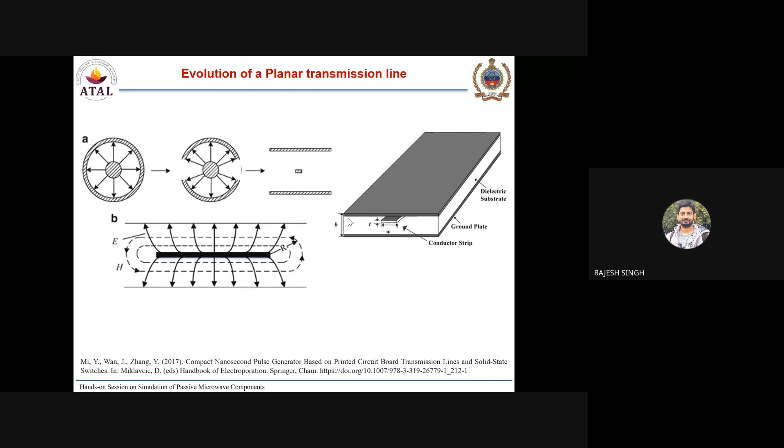And if we take the E and H cross product, then you will have the feeding which will go inside this center conductor. So this is the basic concept of coaxial cable or maybe other cables. So now we have moved from the 3D coaxial cable to the strip line. So why are we saying it is planar? Because the third dimension, which we see in the height, is actually very, very small. So we treat this dimension as much less than lambda. So we call this line a planar line or 2D line.

But the problem with the strip line is a handling issue. So this is the circuit. It is based on the strip line. So what is the problem in the strip line? Suppose you have any component. So these are the tracks. We will discuss what these tracks are. As of now, just think that some substrate is there, some thicker and thinner tracks are there, and some connectors are connected. So the problem of strip line is you have to cover this whole part, because on both sides we have a metallic enclosure.

So the problem is, suppose some problem is there in this; maybe this is a simple passive network. If this is an active network, then there will be more issues. Suppose you want to remove some lumped component from the circuit, L and C, or it may be a device like a FET or BJT, then there will be a problem. You have to remove this cover first, then only you can make some changes. So there are some advantages of this technology, but still it is not very much in use.

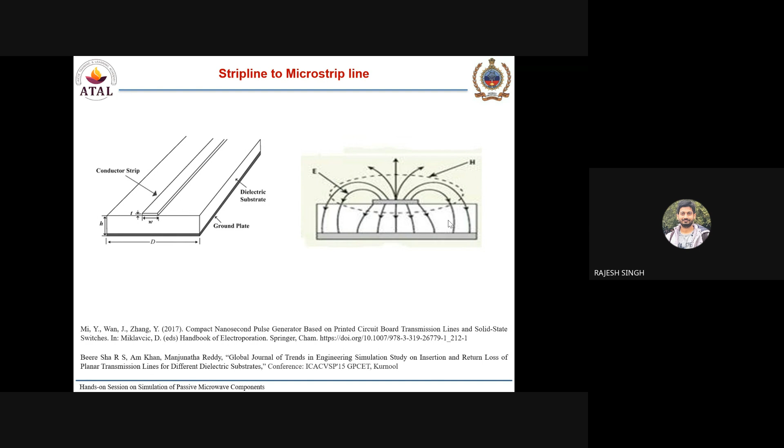So what is the solution? This strip line can be converted into a microstrip line. What we are doing here is just removing the top ground part. So we have just a metallic strip, a small thickness strip, and then you have ground. So this is the structure. Field lines will be more or less the same. Electric field lines will go from the center pin to the ground, because all field lines will terminate into ground. There is no outer conductor at the top side, so these field lines will go in the air and again terminate into this ground. So this is the concept of the microstrip line, which is generated from the strip line.

So this is a microstrip based component. This is just one example we have taken. One switch is there. This is the connector, a coaxial connector, where we will feed RF. On that side maybe we can receive that RF. Here you can see there is a dielectric. So this PCB has some dielectric constant. It looks like this. And there is a track, a 50 ohm line, and one component is connected. It may be anything. It may be a lumped component like L and C. It may be any active device.

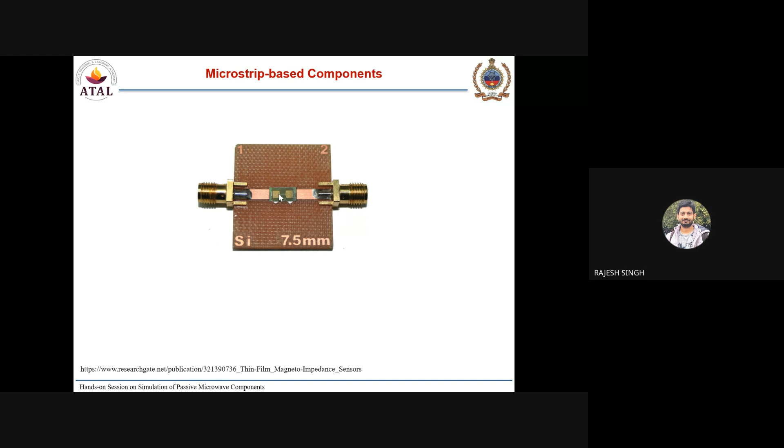But from this picture, we can understand very easily that if we want to handle such components on a microstrip line, it is very easy. You can just desolder it, remove it, and replace the components. Also, this microstrip line is useful not only for feeding but for practical applications like transmitters and receivers. A transmitter will have a power amplifier, some mixer and then an antenna. All these components can be integrated on the same PCB. So this is the usefulness of microstrip based components. So people are using microstrip lines for practical use.

Now we see in general what the differences are between microstrip and strip line. We will discuss a few parameters like propagation constant, which is lower. Lower means waves move faster in the microstrip line, whereas in strip line waves move slower. So this is not the major factor. The major factors are radiation losses and dielectric losses. Dielectric losses in microstrip line are lower because the field lines going from the center pin to the ground pass through less dielectric compared to the strip line.

But the radiation losses are more because this circuit is open. A strip line is closed, so radiation losses will be less. So this is the advantage of a strip line. When we want more and more directivity, we have to use a strip line. Low loss circuits are made from a strip line.

If we talk about trace width, we normally take 50 ohm impedance. So when we calculate the width of the line for 50 ohm, it will be twice the strip line width. So width is more in case of microstrip line. So strip line can be thinner compared to the microstrip.

Shielding is lower in case of microstrip line based on this enclosure, and it is high shielding in the case of strip line. So these are the general parameters where we can see some differences between strip line and microstrip line.

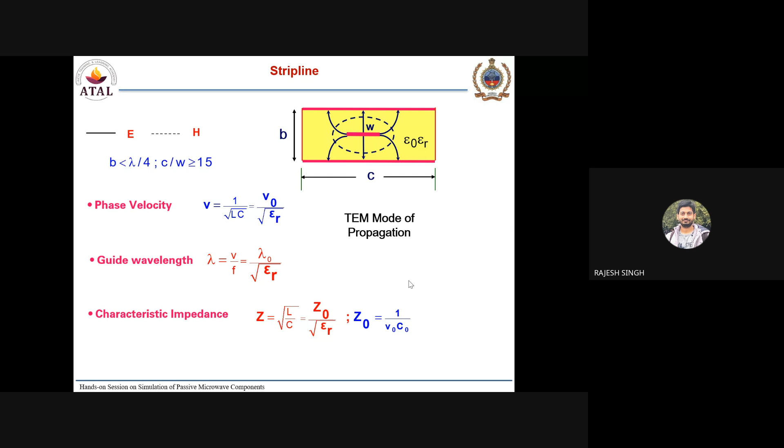So characteristic impedance and propagation constant are the two parameters which we consider for planar lines. This is the basic configuration as already discussed: a microstrip line has a metallic strip, and on the back side there is a ground plane, so it is very convenient to mount discrete devices like L and C components, or active devices like BJT, FET.

But one more challenge in the microstrip line is that a quasi TEM mode is propagating. We know that in coaxial cables, TEM mode propagates. What is TEM mode? Transverse electromagnetic mode, where electric field and magnetic field are orthogonal to each other, and both are orthogonal to the propagation direction. But in the microstrip line, there is another mode traveling along with that dominant TEM mode, called the surface wave mode.

So this surface wave mode comes in the microstrip line because of the discontinuity in the field. When signal is traveling from here to here, it will face two dielectrics: one is air, another is the dielectric. But this doesn't happen in case of coaxial cable or strip line, where there is no air inside.

Because of the two different dielectric media, we have one more mode traveling along the line. We call this mode quasi-TEM or TEM-like mode. Dominant is TEM, but there will still be a small component which takes small power in that mode, so it will be wasted. So directivity in microstrip lines is lesser than strip line. Due to mismatch of velocity of propagation at the interface between air and dielectric, we have quasi-TEM mode.

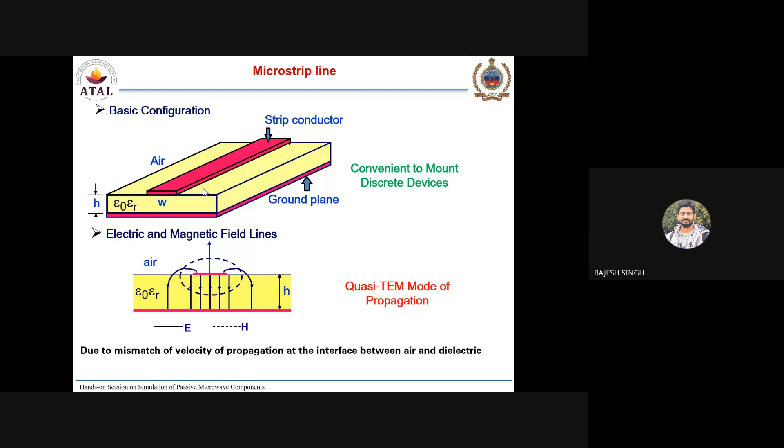Now, if you want to make a microstrip line, there are parameters like the substrate. So how can you make a microstrip line? First, we purchase a material. That material will have a dielectric constant, which we call epsilon r, and there will be a finite thickness of the substrate. So two parameters are defined for the substrate, which are epsilon r and h.

Based on these two parameters, we can calculate what is the value of Z and what should be the width of that strip for a 50 ohm line. It's very simple. When we see CST Microwave Studio, you can just directly put the impedance value and get this H and epsilon r, or vice versa.

So the characteristic impedance varies with the epsilon effective. When there is an epsilon r or epsilon effective, we have different characteristic impedance, so it varies with frequency. This is the problem in the microstrip line, but this variation is very, very less, so sometimes we may ignore this variation.

Now the microstrip line we have, which we made from a coaxial cable. There are lumped components we have studied maybe in network theory, where we have RLC components. The same components we can make by using a small piece of transmission line. If we take a small piece of microstrip line, we can make either an inductor or a capacitor.

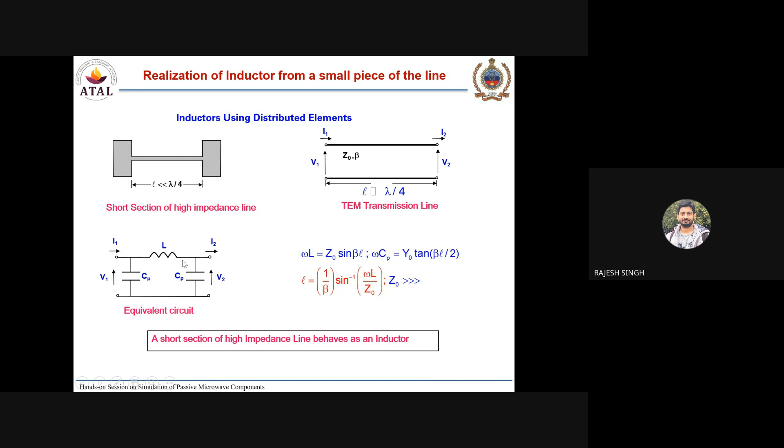Now the question is why we are getting a shunt capacitor. In the last slide we discussed it was a series inductor. Now should it be a shunt capacitor or a series capacitor?

So in the microstrip line, we see the top side metal, and on the bottom side we know there is a ground. In between there is a dielectric. So both metals will give you a capacitor value which will be shunt. The signal goes from top to bottom, so the electric field lines will be from top to bottom. So this component will be a shunt component, not a series component.

If we want to create a series capacitor, we can take two transmission lines with a small gap. A small gap will give you a series capacitor. So this is how we get a capacitor or inductor by taking a small piece of line.

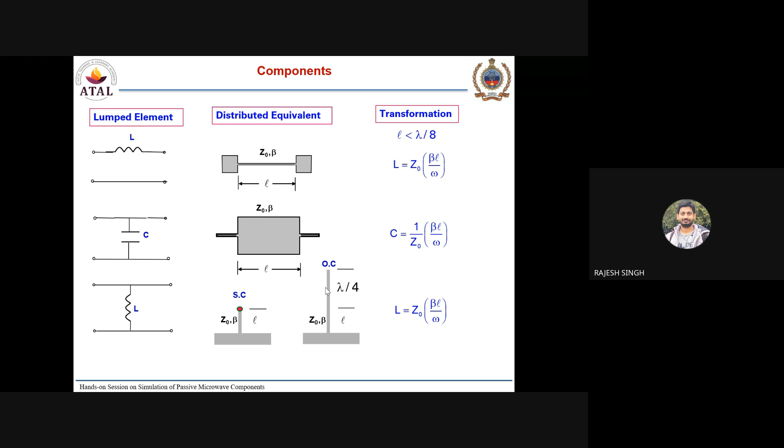Similarly, not only this inductor and capacitor, you may get a shunt inductor or shunt capacitor by just seeing how we are getting this. By taking a small width of line or a large width of line, we can get inductor and capacitor.

Also, we can get some resonators, like LC resonators. So this is shunt values L and C, this is series and this is shunt. So both we can achieve by changing the thickness of the microstrip line. This is the usefulness of the microstrip line, that we don't need to use lumped components.

We can take small sections of transmission line. By just changing the width, we can change its property. So if you want to make resonators for, let's say, a microwave integrated circuit, you can create L and C very easily.

See this portion: if you create a slot in this side metal, it will give you an interdigital capacitor. Similarly, if you take this small thickness line, it will give you an inductor. So you may get an LC network.

Similarly, for a shunt parallel resonant circuit, you can connect this line here at this conductor, and another port connected to another conductor. So in this case, you will get a parallel resonant circuit. So these circuits are planar.

Now we move to the other component. We have now created L and C. Now it will be simple to get a low pass filter, high pass filter, or maybe band pass, band stop filters.

So how can we make this? Let's say this circuit has an inductor, one capacitor, another capacitor. So what is this circuit? This is a low pass filter, a 3-element low pass filter.

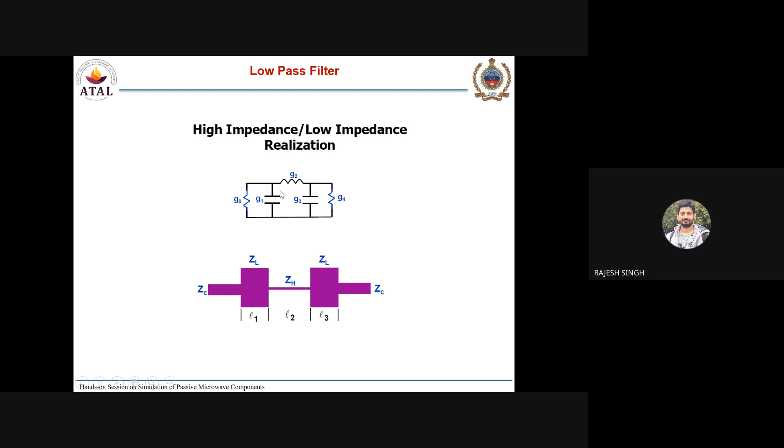So for a low pass filter, you may take multiple elements to get a sharp roll-off. You can increase the number of elements. Similarly, you can take more thick and thin lines. So we call this filter a high-low line filter.

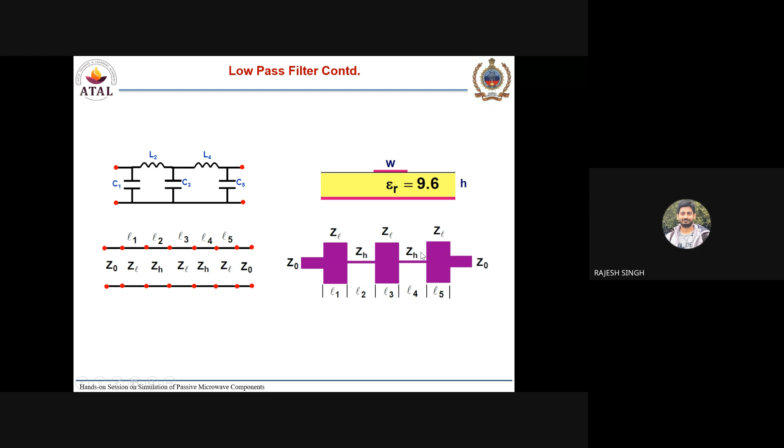High-low is based on the impedance: high impedance means less width, low impedance means high width. Similarly, you can very easily create a high pass filter.

So a high pass filter is again based on a low pass filter structure, but you create it differently. In that case, what is the series component? It's C, and the shunt component will be L. So you can get this shunt inductor and series capacitor.

So by creating a small gap in the transmission line, you may get the series C, and for L, you may take a thin line, but you have to short it to the ground. Then you may get this inductor.

Okay. Now we talk about the band pass filter. Similarly, as with the low pass filter and high pass filter, again we can create high-low line, and we can get band pass filter and band stop filter by series LC and shunt LC. In band stop filter, shunt LC and series LC, which we have discussed in the previous slides. So like this, you can get series LC, shunt LC.

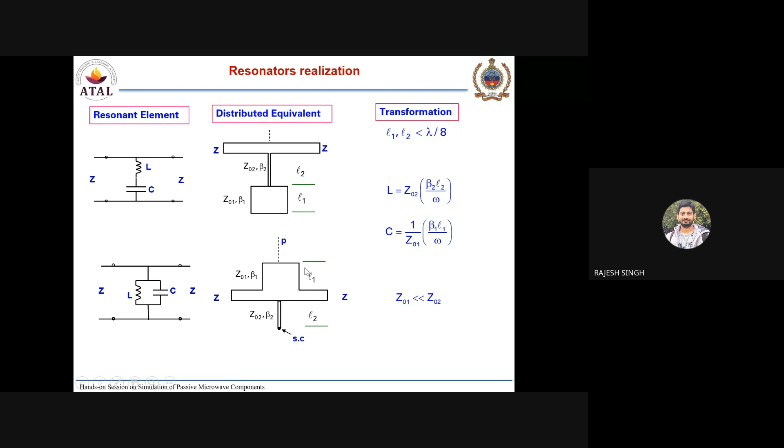You can take just 2 lines and you can create a band pass filter, but it will be a poor band pass filter. It will not be a sharp roll off. So if we make multiple sections, we can increase the bandwidth of that filter. So we can get more bandwidth for the band pass filter. There are proper formulas to design such kind of filters, but it is very easy to design.

Now we move to the couplers and the power dividers. So first thing is what are the couplers and why we use couplers and dividers. Let's take an example: beam steering. In the 5G and 6G technologies, what we have in the future is switching the beam or steering the beam. So how can we steer the beam? We have to make some beam forming networks. Beam forming networks you can make by using power combiners or power dividers, which we will discuss. So couplers and dividers.

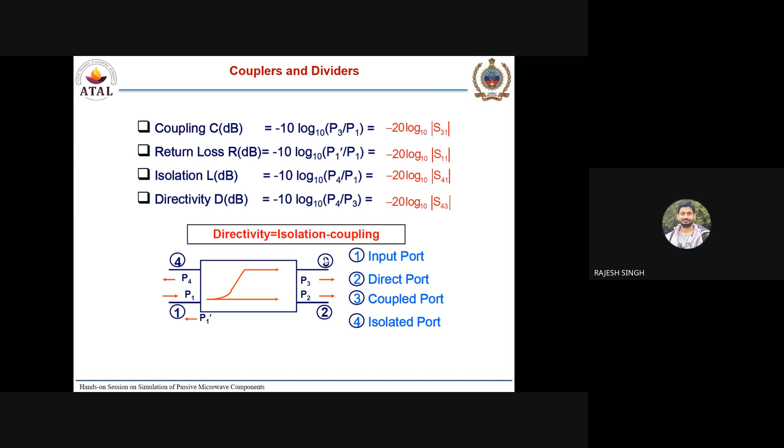Directivity is P4 by P3: how much power is coupled and how much power is coming at port number 4. Ideally, we say that power will not go to port number 4, it will be 0, but practically there will be some power. So the ratio P3 over P4 should be 30 dB or 40 dB. Then we say that the directivity of that coupler is higher.

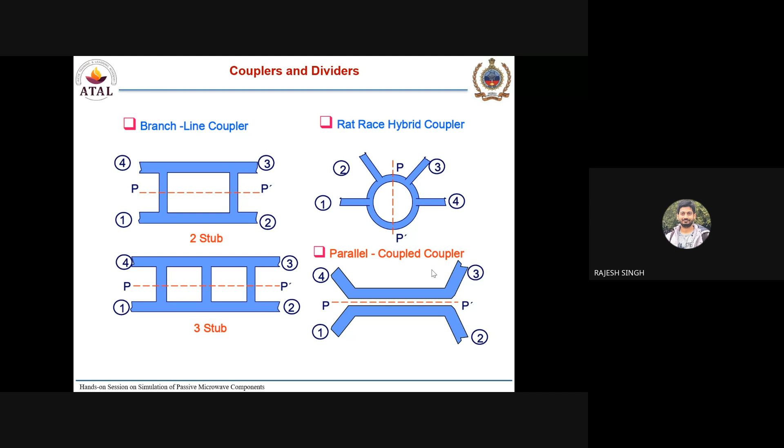So in this branch line coupler, all these lengths are lambda by 4. This length is lambda by 4. This length is lambda by 4. So what is happening? This width and this width look the same in this picture, but they are different. As you go through the equations for the width of this line, the impedance of this line is low. From the formula, this impedance becomes low. Because of the low impedance, you have to increase the thickness of this line. So this line's thickness is more, and this one is 50 ohm.

So the bandwidth we can get from a branch line coupler will be around 10% if we are using two stubs. If we add one more stub, then we can get up to 25%. If you want more, then you can increase the number of stubs. The coupling value is 0 to 9 dB. So we can get a coupling value between 0 and 9 dB from a branch line coupler. If we want to make a coupler with a 12 dB coupling coefficient, we cannot make it.

So why can we not make more than 9 dB of coupling coefficient? When you increase the coupling coefficient, the width of these stubs changes. This one will increase and this one will reduce. When we reduce this width to get more and more coupling, at some point it will not be realizable. It will not be practically feasible to realize this thin line, so you have to compromise on the coupling value. So you cannot make more than a 10 dB coupler with branch line technology.

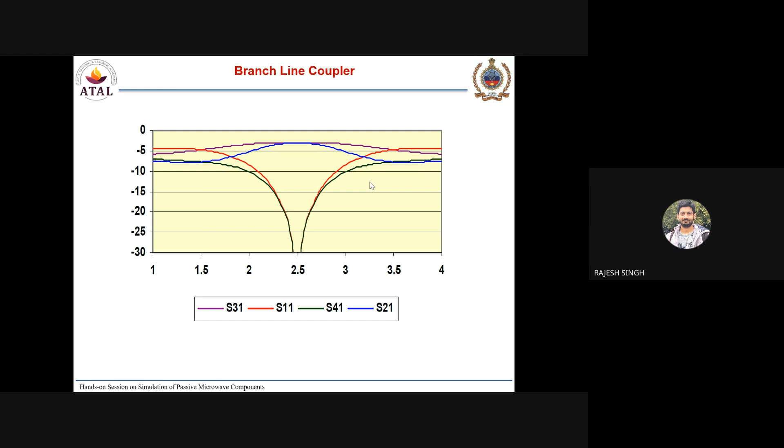So we will define the bandwidth of this coupler based on the coupling values, not from the S11 parameter. Normally we define the bandwidth of a component by seeing the S11 parameter. But for couplers or power dividers, we have to define the bandwidth where we have equal S21 and S31 values. So this is a little bit different from the definition point of view of the components.

Now we see one or two applications of the branch line coupler, which are very interesting. Duplexer. When we have to make a duplexer, we can use a BLC, branch line coupler. What is the use of a duplexer? Suppose we have a radar. We want to transmit a signal, and this radar will again receive that signal. With the duplexer, we can transmit that signal; that time the signal will not reach the receiver, but when a signal is coming from other directions, it will go towards the receiver. It will switch in transmission mode so that the transmitted signal goes directly to the environment.

So how can we make this by using a BLC? Suppose you have this 3 dB branch line coupler with two output ports. You can directly connect two PIN diodes at the output ports of the branch line coupler. And you take another identical branch line coupler and terminate one port with 50 ohm impedance so that all power will be absorbed, and make it ground. Here you have connected one receiver. So let's see how it works. This is the transmitter, this side is the receiver, and this side is the antenna.

So in the transmission time, what will happen? When we transmit the signal, we will switch on the PIN diodes. If the PIN diodes are switched on, both are connected to the ground. So when the signal comes towards the diode, it will find that it is grounded, and the signal will be reflected back. Both signals will be reflected back, go towards the antenna, and be combined here. So the transmitter signal will go towards the antenna. No signal will pass from here to here because there is a ground.

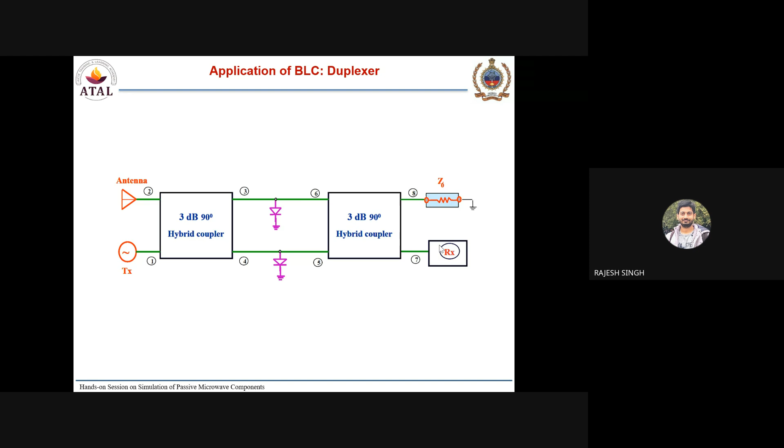So you can connect a very small, what we can say 40 dB or 30 dB, coupler. So you can sense the power, because in high power lines you cannot directly connect the receiver at the output side. So to check how much power is going in the main line, you can extract some power from that main line, and you can calculate very easily how much power is going in the main line. So this is the benefit of these couplers.

So between the parallel coupled coupler and the branch line coupler, if you see the difference, the advantage of the parallel coupled coupler is that it offers large bandwidth; a single section will give you 40%. Input ports are perfectly matched at all frequencies, and loose as well as tight coupling is possible. So if you want 10 dB coupling or 40 dB coupling, you can achieve it from parallel coupled coupling.

But the same coupling you cannot achieve from the branch line coupler, because we saw in the previous slide that if you go beyond 10 dB coupling, you cannot get it, because this line will be very, very thin.

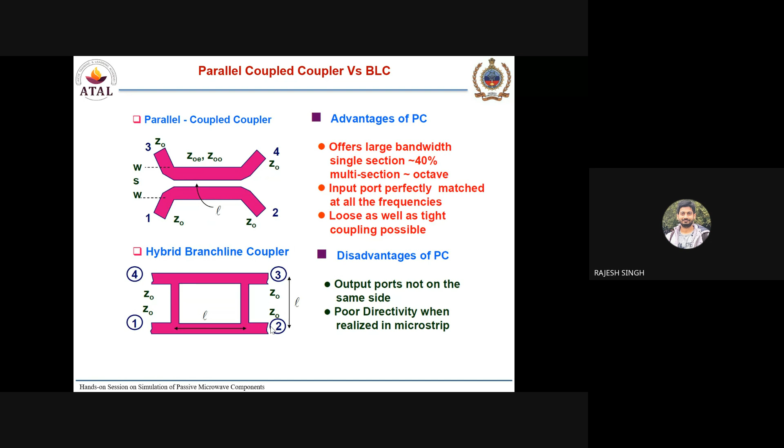The rat race coupler is actually a very useful component in RF circuits nowadays. Whenever we want to track any target, we send one signal from the radar, this signal will be reflected back from the target, and again we receive that signal. We receive that signal by using some antennas. After the antennas, we will use this device, the rat race coupler.

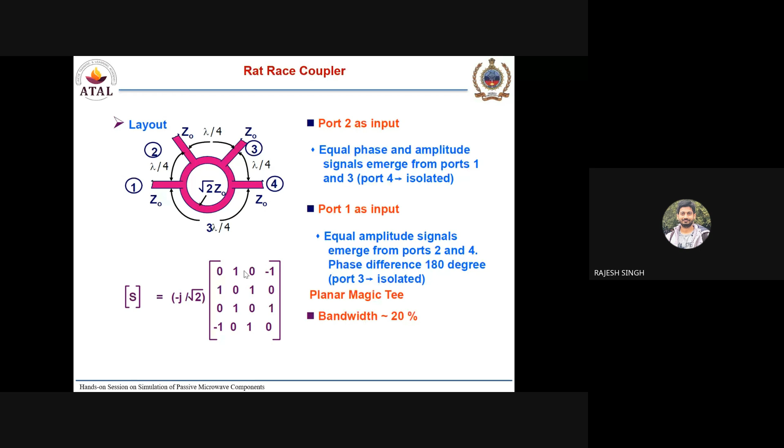So for the rat race coupler, if I go directly to this next slide, let's say we feed a signal at port 1 and port 3, then what will happen? A difference signal is available at port 4, which is the difference port. A sum signal will be available at port number 2. So these two signals will be added at port number 2 and subtracted at port number 4. So this is the speciality of this rat race.

It is because of the different lengths. One port is connected to another port with a distance of lambda by 4, here again lambda by 4, here again lambda by 4, but this distance is 3 lambda by 4. So what is happening here? If you send a signal at port number 3, this signal will go from here to here. Similarly, one signal will come from this port and go here. So both signals reaching port number 2 will have the same phase. This signal will travel lambda by 4, this signal will travel lambda by 4, so they will add.

What is happening at port number 4? This signal will also go in this side, and this signal will go in this side. So this one is facing only lambda by 4, and this one is facing 3 lambda by 4. So there is a difference of 180-degree phase shift. And we know that if there is a 180-degree phase difference, the signal will be cancelled out. So we are getting the subtraction of the signal at port number 4. So at the reception side, we use this rat race device.

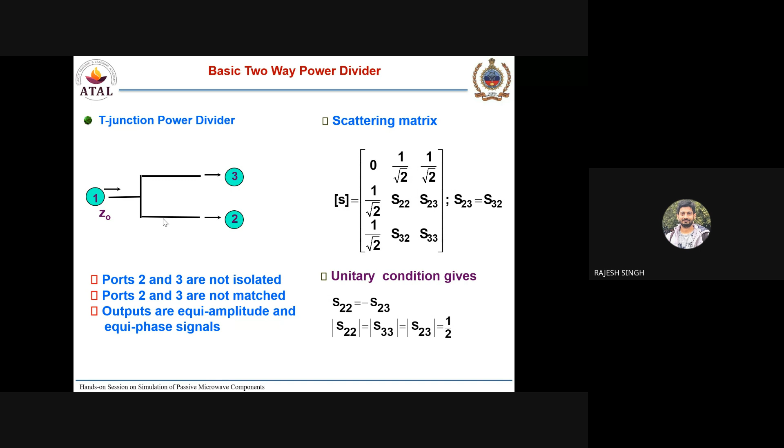When we transmit one signal, it will be equally divided. That is okay when we are using this component as a power divider. But if we want to use the same component as a power combiner, there was an issue that when the signal comes in at port number 3, it should not go to port number 2. So any signal traveling from port number 3 to 2 will be absorbed in this resistor. And this resistor value is around 100 ohm. You will understand this very well when you see the design equations.

So this power divider is actually in practical use. This power divider can have multiple sections, what we can call multi-section power dividers. So these are Wilkinson power dividers, which we use at microwave frequencies.

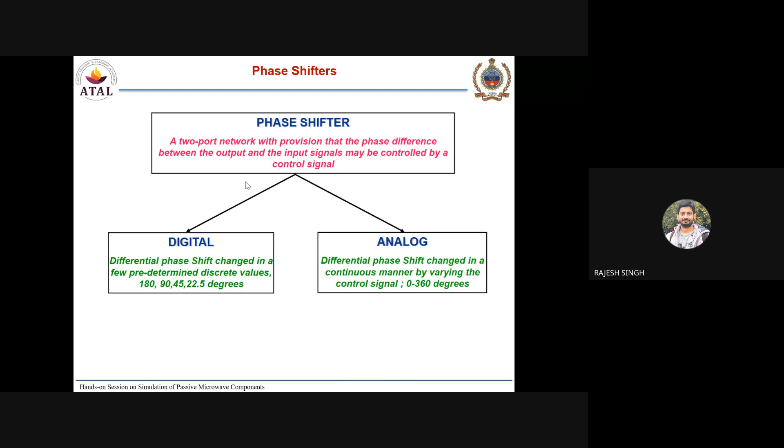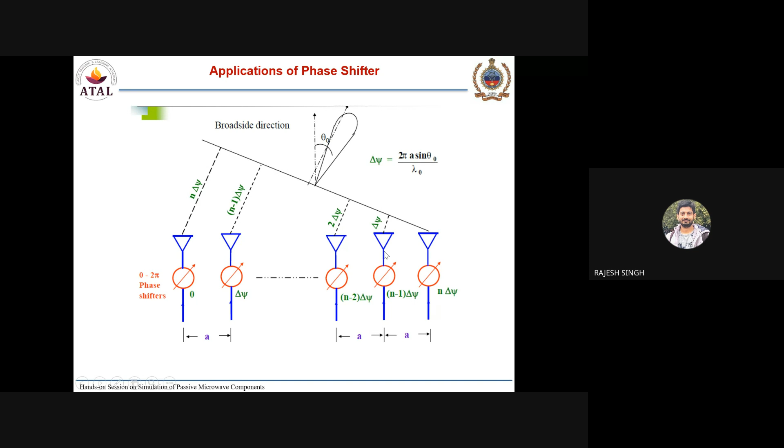So how can we make these phase shifters? One very simple example of a phase shifter uses a PIN diode. When we are using a PIN diode, we may have two types of phase shifter. One is the reflection type, the other is the transmission type. So we will take one example here.

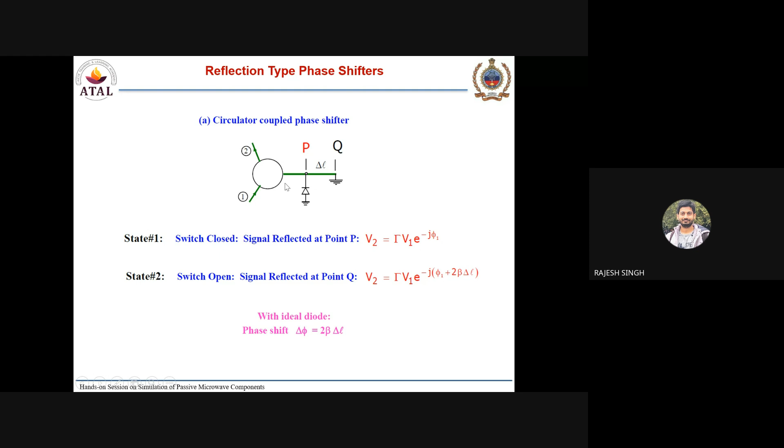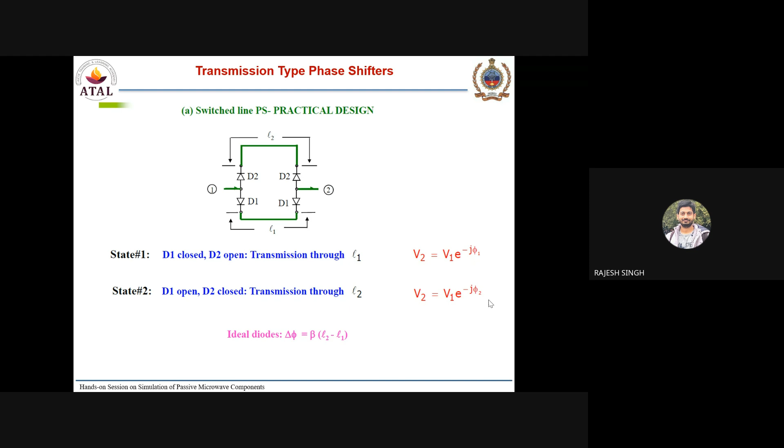So phi 1 and phi 2 you can create very easily by using these four pin diodes. Why do we always use pin diodes? Because the PN diode we cannot use due to low switching speed. Pin diodes have very high switching speed, so we use pin diodes for switching at high frequency.

So next, most of the components if you see in the RF domain, in any circuit or transceiver, you will have all these passive components: couplers, power dividers, filters, parallel coupled couplers, and phase shifters. The rest are active components which we are not discussing here: power amplifiers, oscillators, mixers, or maybe PLLs.

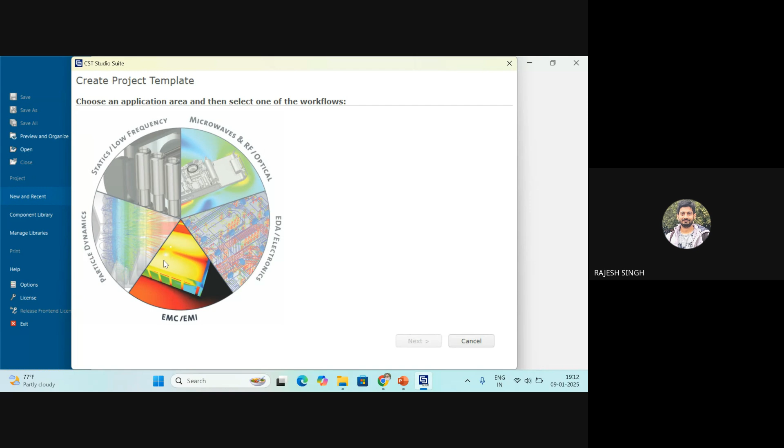There are various options in CST Studio. You cannot only design microwave and RF components, you can design components at very high frequency starting from very low frequency. If you want to get some EMI EMC analysis also, you can do that in the software. So here we are discussing the RF and microwave domain.

So we will select this. When we select it, you have some options like antennas, circuit components, some radar applications, biomedical which is SAR. Suppose you want to design an antenna for mobile, then you have to check the SAR value, which is specific absorption rate.

Then we have periodic structures like metamaterials, and we have optical applications. So for all these applications, this CST may be useful.

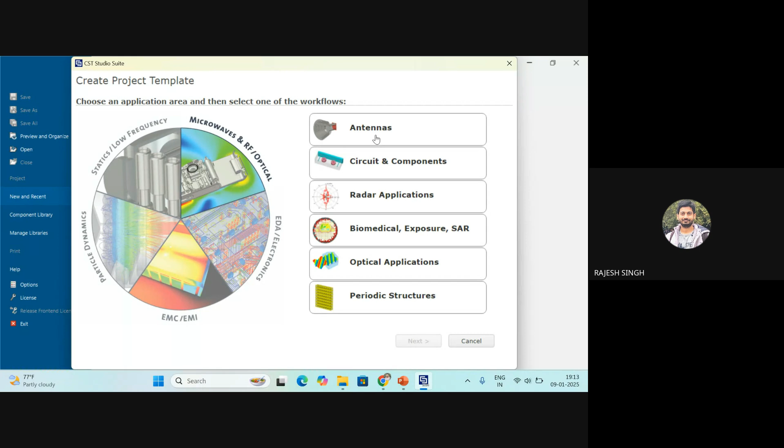So what type of component or circuit you are making, you can select any of the tiles from here. So we are going to circuit and component, I'll choose here. Again, you can choose whether it is waveguide type or planar type or maybe some other type. So we are choosing planar, let's say planar filter. Again, there are some calculation tools.

So this software doesn't do anything by itself. We have to tell this tool to do some simulation. So for calculating the E and H field values, we have to choose the solver.

There are two types of solvers in this CST studio: one is the time domain and another is the frequency domain. So what is the difference between time domain and frequency domain? It is not that simple to see. If we are designing a microstrip line, or maybe a filter or power divider, you cannot find any difference between frequency domain and time domain.

It is actually when you have complex structures, when you have broadband structures, that it may be faster in time domain and slower in frequency domain. That is a separate story.

By default, we can set the units, it is in millimeter and frequency is gigahertz. Here you can select the frequency. Suppose you want to check the performance of a component from 1 to 10 gigahertz, so you can set minimum frequency 1, maximum frequency 10 gigahertz. Now it is ready.

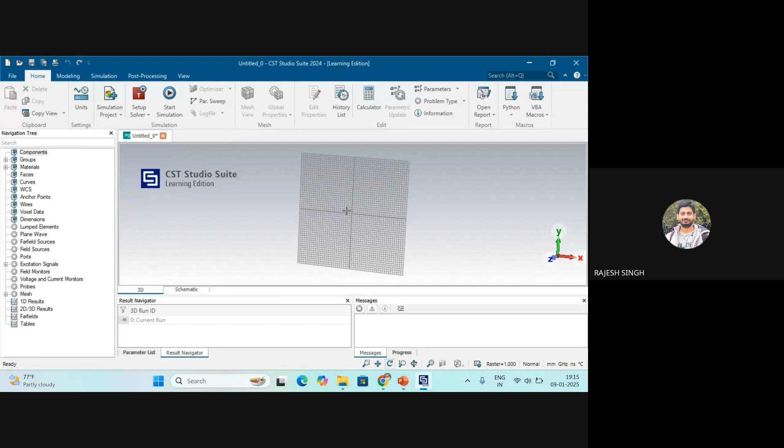So I will not waste time designing the circuit live. I have already simulated some components, so I will show you those components.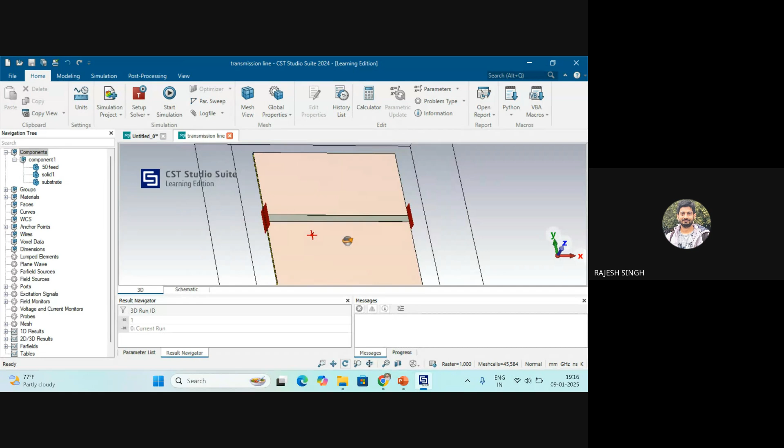So this microstrip line is a 50 ohm line. Why am I saying this is a 50 ohm line? Because the width of this line gives us the 50 ohm impedance. So how can we calculate this?

If you see, there is a calculator in this CST tool. You may get somewhere a tool where you can calculate very easily this impedance value from the width. So you can check in this tool where the calculator is, I think in home there is a calculator like this. So in this calculator you may get very easily the values for the 50 ohm line.

So this 50 ohm line you can create, and now you have to assign the ports. In hardware, we solder SMA connectors at both ports, but we don't need to make this SMA connector in the software. We can assign a waveguide port instead, which will act similarly to coaxial connectors. So one port at this side, another port at this side. It is that simple.

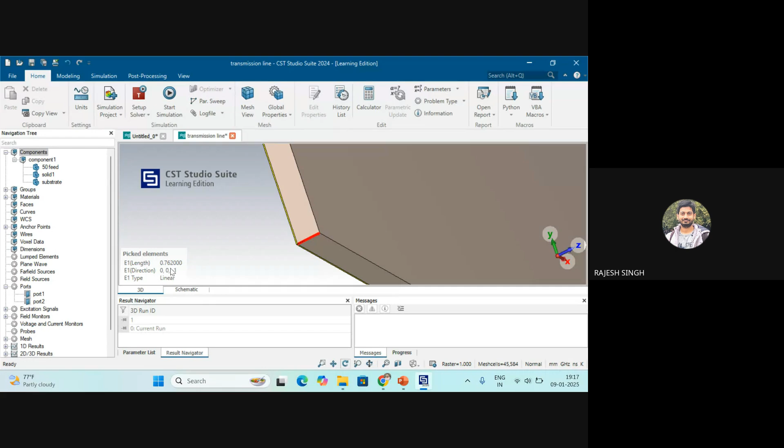It is a 3D model, and there is some thickness of this PCB, 0.762 mm, which is a 30 mil substrate. Whenever we buy substrate, it comes not in mm dimensions, it comes in mils - 10 mil, 20 mil, 30 mil. These are the standards. So when you convert these mils to mm, 30 mil gives us 0.762 mm.

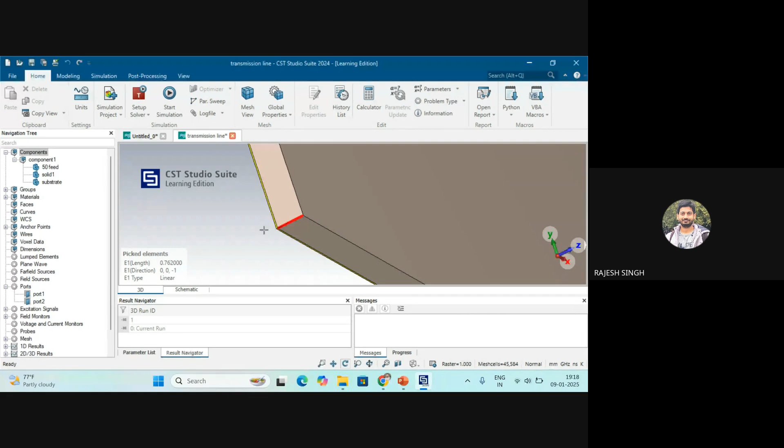You cannot choose any random value for this because you cannot make this substrate yourself, you have to purchase it. So you first see what thicknesses are available for that substrate. Here we choose the Rogers 5880 substrate, which has a dielectric constant of 2.2, a very high quality substrate. For commercial applications, people don't use Rogers substrate because it is very costly.

People use FR4 substrate, which is a very low cost substrate. There is a difference in circuit performance, but who cares about that? Because it is for commercial purposes, and people go for low cost circuits.

So now if you see the results, on the left side we can see all the results. First, let's look at S parameters. So in S parameters, you can see S11, S21, S12, and S22. Because we have two ports, we will have four parameters.

So what is the value of S11? You see, this is S11. S11 means reflection coefficient, and reflection coefficient below minus 10 dB is quite acceptable. This value is below minus 25 dB, which means reflection is very, very less.

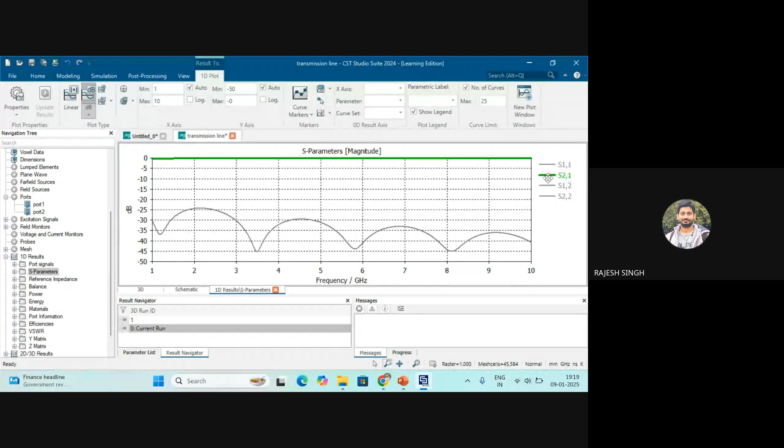S21 is the transmission coefficient. So whatever power you are giving from port number 1 should reach port number 2. This is the value of S21. S21 being 0 dB means, if you calculate the value, S21 will be 1, and if you take the log of 1, it will be 0. So if it is near 0, then it is...

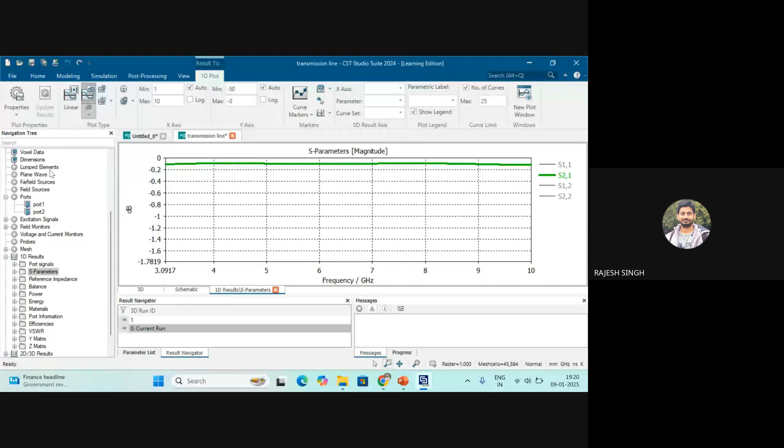...an ideal substrate, but we know that there is nothing ideal in a substrate. We have to purchase this substrate, and it will have some finite dielectric value, or resistivity for the conductor, because copper will not be a pure conductor. So there will be some loss, maybe 0.2 dB, 0.3 dB, or more. FR4 may have 0.8 or 0.85 dB loss. With respect to frequency, this loss increases. So when we draw these graphs, this loss increases at higher frequencies.

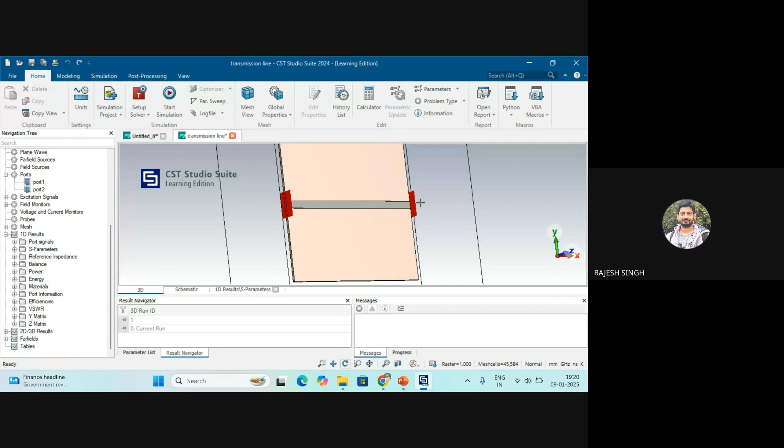Now this is the S parameter. S parameter tells how much power is reflected back, and how much power goes from port number 1 to port number 2. Also, we can check the field lines in the 2D results. Field lines are E field and H field. If you check the E field, we know this arrow will go from top to bottom, so you can check if these field lines are correct or not.

Also, you can check the mode — what mode is propagating in the microstrip line. All these things we can do. Surface currents — we can also check surface current. What is the surface current?

We will discuss this surface current in tomorrow's lecture, where we will see the antenna, because an antenna can be understood by seeing the surface currents — if it is circular or linear — and by seeing the surface current value we can check how this surface current is flowing.

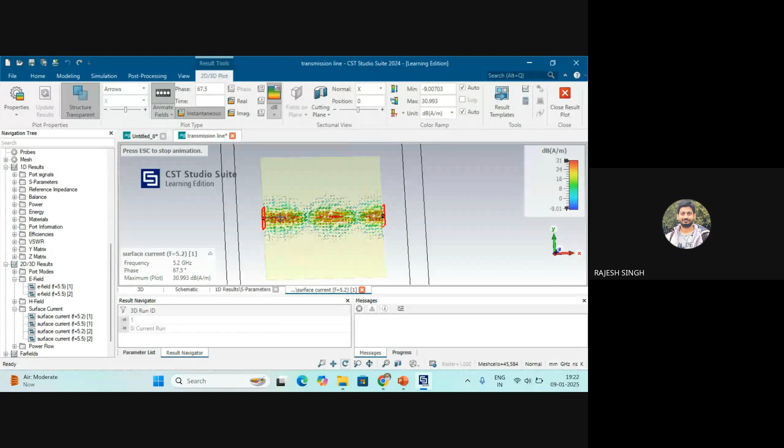Then we can see, by animating this field, how power moves from port number 1 to port number 2 with respect to these fields. So E and H vary continuously with time, but every time the power direction will be along the x-axis. Power flows from here to here with some field configuration of E and H. So this is the case of a transmission line.

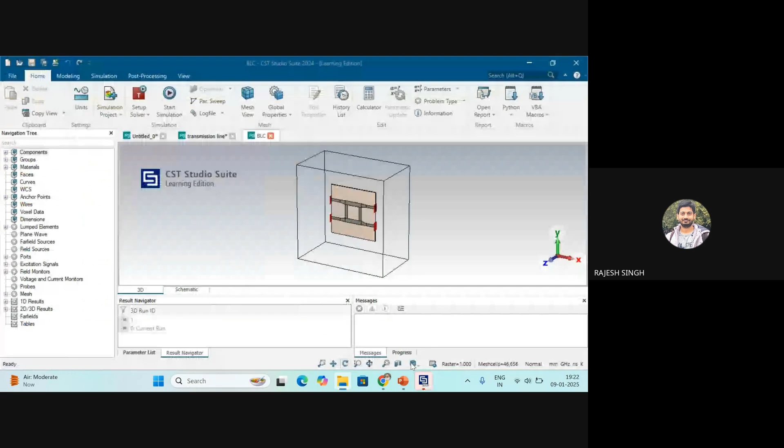Let's see one more component, which is a branch line coupler. This is the branch line coupler which we discussed in theory. You can make it very easily. These lines are thicker, meaning width is more, and this width is similar to the 50 ohm line.

So it is a 3 dB coupler. 3 dB means half power will be delivered to this port and this port. How can we check? We can check the results as S parameters. This coupler is designed at around 3.3 gigahertz. So you can check S11 — reflection coefficient is well below minus 15 or minus 20 dB.

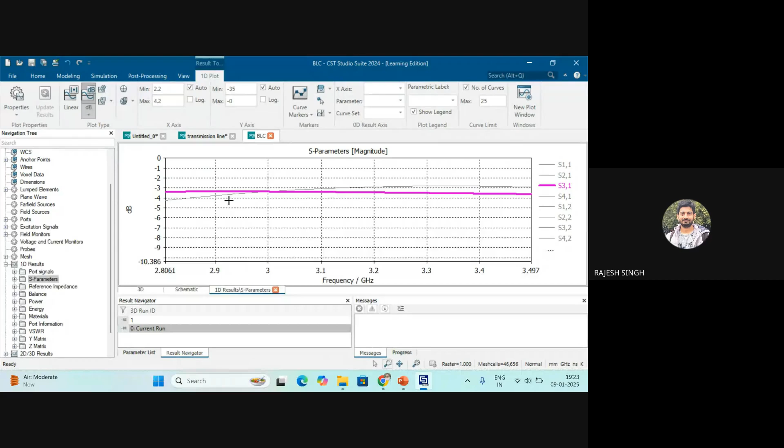What is S21? S21 is this, and S31 is this. So S21 and S31 are matching at this portion. This is the only bandwidth we are getting in this branch line coupler.

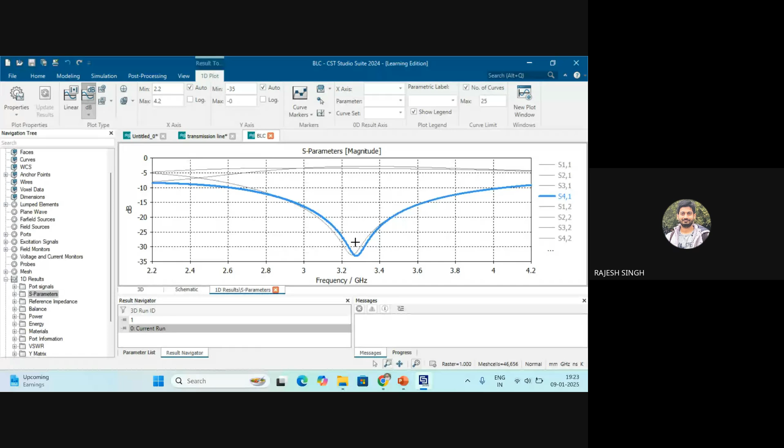Also, if you see one more result, which is S41 — this is the isolation port which we discussed. The isolation port again has a very low value. So in S41 we are not getting any value. We are not getting power at port number 4, so it is isolated.

Another component we will see is the power divider that we discussed.

Based on the theory which we discussed, we can easily design these components and see the simulation. Then we can go for fabrication and compare the simulated and measured results.

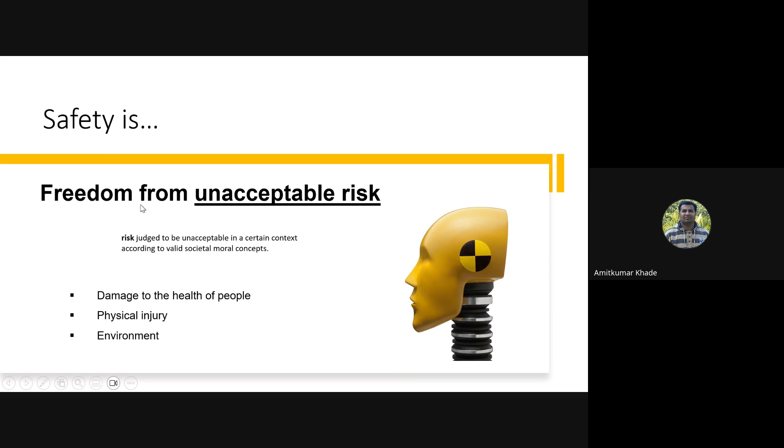Every territory, it may be the UK, US, Asia, has certain norms related to pollution, related to sound, related to other factors. So our product should not cause a risk to these standards. Okay, so if the risk comes under this kind of category, this risk is not acceptable at all. So when I am talking about safety, it is expected that the product is free from unacceptable risk.

Now safety has different aspects. People may talk about product safety, environmental safety, human life safety, or infrastructure safety.

But when we are talking about electronic safety, there is a concept called functional safety. This is the word which is commonly used for electronic products. Now, when we are talking about functional safety, what is the objective of functional safety? Any failure or any fault in an electrical or electronic system should not cause an unacceptable risk. If the fault in the component or the failure in the component has an unacceptable risk, it should be detected, addressed, or mitigated by some mechanism.

So when we are talking about this kind of safety, this is called functional safety. And we have a very standard definition for functional safety. Functional safety is the part of the overall safety of the system. Now, when I'm talking about the system, it may be a huge electronic system like an ECU, or it may be a single board or piece of equipment that depends on the safety mechanism. Now, what is the safety mechanism? Let's say we are an electronics engineer.

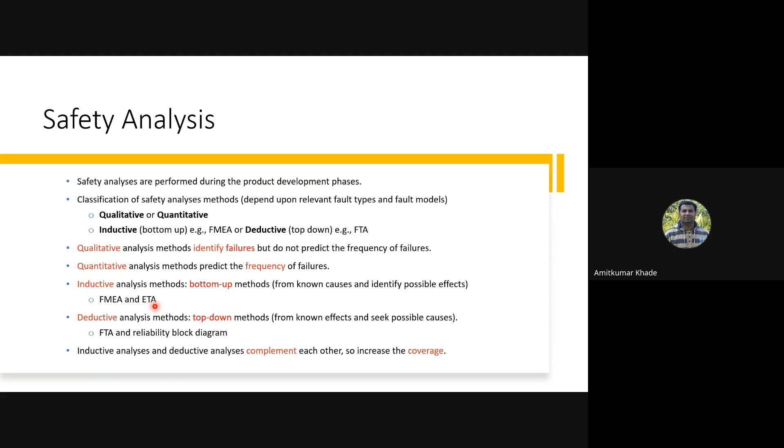So let's start with the deductive analysis. As already told, it is a top to bottom approach. So work backward from hazard to causes. Okay. So here I have the event, like as already told, the amplifier should amplify the signal. This is the expected behavior from the amplifier. But if it is not amplifying, I know there is a wrong behavior. So the amplifier may not amplify the signal.

So this is the top event, and then I need to understand what are the different causes which can lead to the amplifier not amplifying the signal. Okay, so it is called going from hazards to the causes. Basically, it is a graphical method that models how failure propagates through the system. Okay, then it also provides the details of how component failure leads to system failure.

Okay, if there is a failure in one of the transistors, what is the possibility that the failure in the transistor will lead to the failure in the amplification functionality? Okay, then it is also possible that not all component failures lead to system failure. See, a system has n number of components, so some components or their failure may not lead to the failure of the entire system. Obviously, there is a degradation in the functionality, but it will not cause a failure.

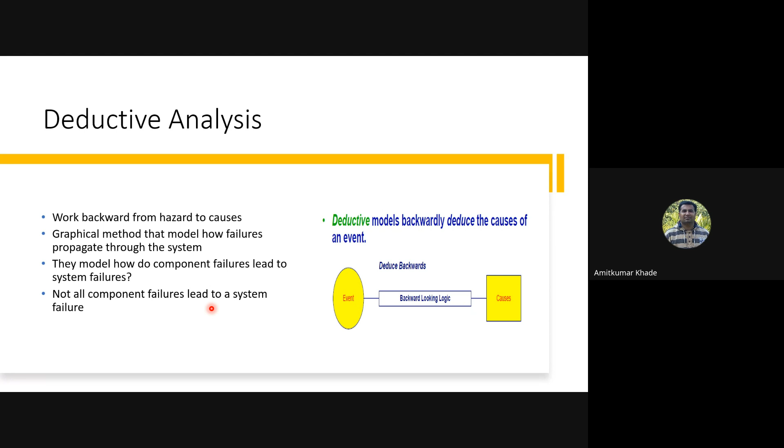Now there is another, which is called the inductive method. It is one of the rigorous methods. When I'm talking about the inductive method, it works forward from fault to the mishap. Means what? It is from bottom to the top. So I have to analyze the different components that we are using to build the product. That component may be a hardware component, a software component, or a combination of both.

Suppose I want to build an autonomous system like a traffic light control module. I know that it has a combination of hardware and software. Okay, so I have to understand what components I'm using to build the product, and if those components fail, how it is going to affect the system or cause the failure of the system. Basically, it is a tabular method. And it is one of the most systematic methods because it starts with the component, that is the single point failure, and it gives the complete analysis of the failure.

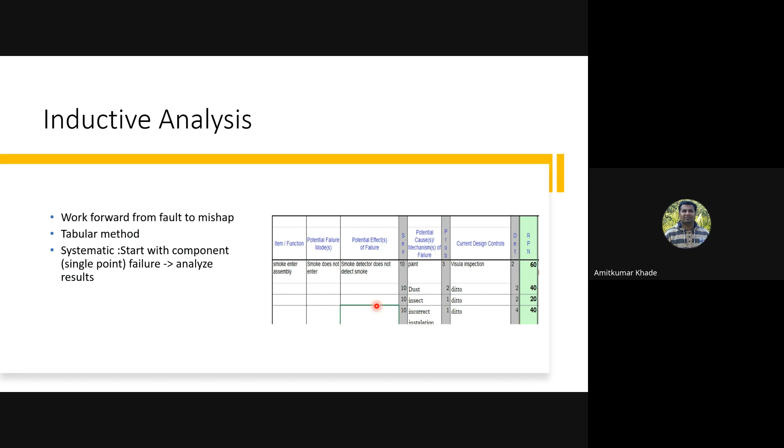As already told, it is one of the rigorous methods. And here we have some templates like item function. Suppose I have a product which detects smoke. So what is the functionality of a smoke detector? Smoke enters the assembly. Then what is the possible failure? Smoke does not enter. We will take a detailed overview of this method in subsequent slides, but this is the typical tabular method, and basically it is based on the risk priority number. We'll see what the risk priority number is in the subsequent slides.

Let's start with one of the most popular methods, that is FTA, fault tree analysis. As it is a deductive analysis, we start from the top and reach the bottom. It basically produces a fault tree. The fault tree is a logical model. Logical model means what? I have some logical gates which represent the relationship of the undesired event to more basic events. The top event of the fault tree is the undesired event. We will see what the undesired event is and all these things. Okay, just try to understand the terminologies.

When I'm talking about the top event, basically it is the event that we are not expecting. As already told, the amplifier is not amplifying the signal. This is the top event for the amplifier. So it is an undesired event basically: the amplifier is not amplifying the signal. Then we check what the middle events are. These are called the intermediate events. Means what are the middle components?

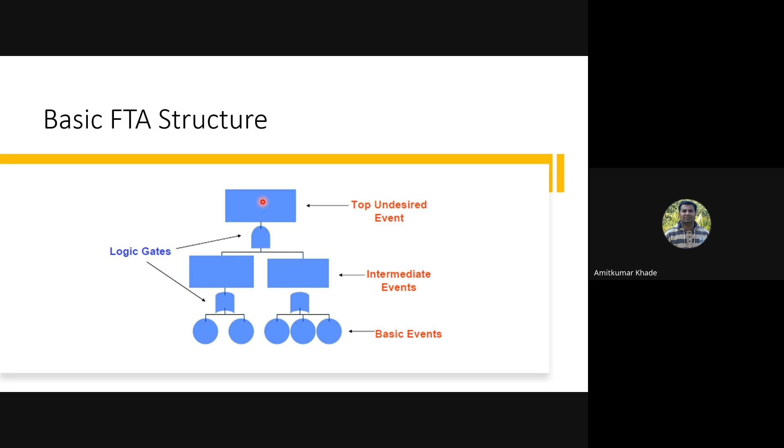So in this way, I'm starting with the top event, and then I'm going to the bottom, and then I will understand, if there is a problem in one of the components, how the faults will propagate into the failures which can cause the undesired top event.

Now, what are the objectives of fault tree analysis? If you refer to any books, there are a number of books on fault tree analysis, because this is a very popular method. So what are the objectives? They provide the common objective. First, resolve the cause of system failure. Obviously, everyone wants to identify the cause of the system failure, and not only the cause, people want to identify the root cause, not the superficial cause.

Then they want to quantify the system failure. When I'm talking about quantifying, it talks about the number. What is the probability that the system fails in a particular way? Then once I'm able to identify the cause, I need to evaluate the potential upgrade to the system. How can I upgrade my system so I can replace that root cause, or remove that root cause.

Sometimes I need to optimize the system also, because I need to put a lot of resources to develop that system. So if I'm able to optimize those resources, I'm able to save cost on that system. Then sometimes a particular system may fail in a particular environment. In that case, I need to understand what was the cause responsible for the particular incident.

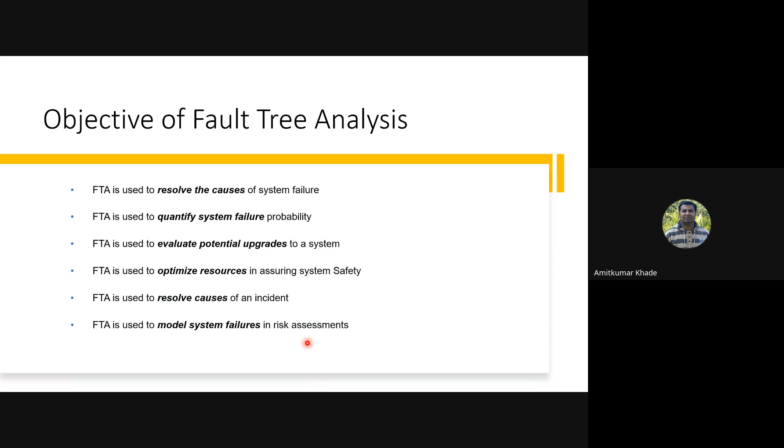Then existing events. What are the other events that I need to consider? Many times people say, sometimes I need to use the particular device as an amplifier, but sometimes it should also work as a switch. Then I need to consider whether my device can really work as a switch as well as an amplifier. If yes, then I need to consider those existing events also. Like a transistor, we know it can operate as a switch as well as an amplifier. Then unallowed events. What does unallowed event mean?

The events not related to that device - what I'm saying is an unallowed event. Amplifier needs to amplify the input signal, but what should be the nature of the input signal? That is not the boundary of the amplifier. The signal may be sinusoidal, square wave, trapezoidal wave, or it may be noise. But it is not the job of the amplifier to understand the nature of the signal. So I need to consider this also an unallowed event.

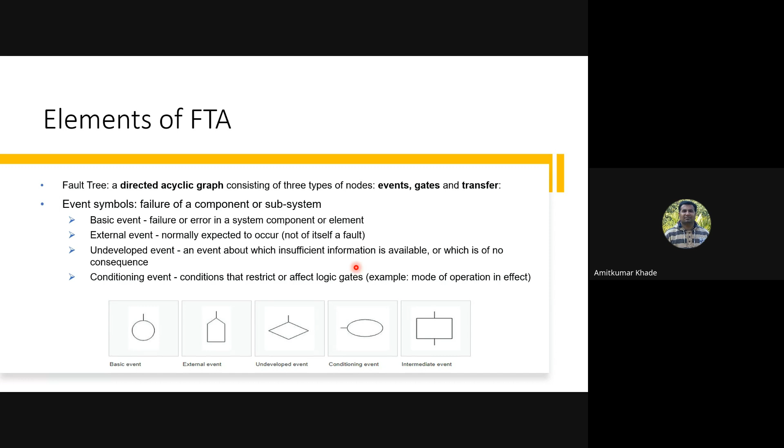Then the gate symbols - there are different gates used to build the FTA. It may be an OR gate, an AND gate, an XOR gate, a priority AND gate, or an inhibit gate. Now, when talking about the priority AND gate...

When you are developing a product, it is always checked what is the intended functionality of the product. Suppose I'm developing a braking system - an electronic control unit which controls the brake. When developing that ECU, the highest priority is that when the user presses the brake, irrespective of the current task or state of your ECU, it doesn't matter.

Your ECU should apply the brakes. Once the user presses the pedal or clutch of the brake system and that signal is activated, whatever the situation of your microcontroller - maybe it's busy writing data to memory or checking other events - but when it receives the input from the pedal, it has to leave all other tasks and give priority to activate the brake.

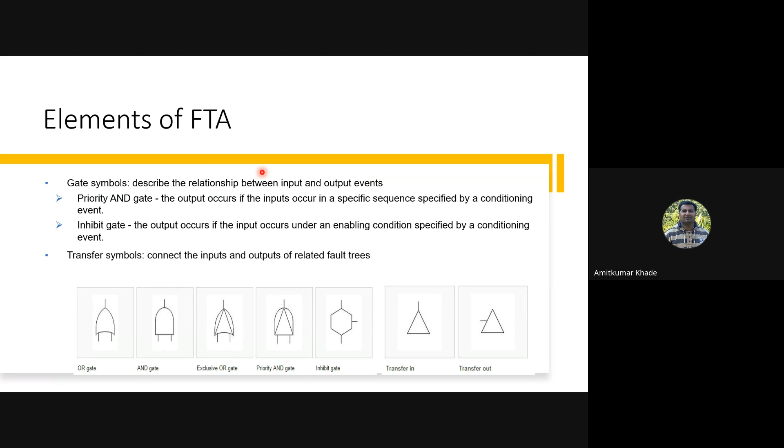Now, when we are building the FTA, we need to understand whether my system is a series system or parallel system. In a control system, if you remember, we have a block diagram reduction methodology, and that kind of logic is also applicable for the fault tree. So here I may have multiple blocks in series. How can I represent that in an FTA? Obviously this is the OR gate.

Why? Because when all blocks are connected in series, if there is a failure in the B element, that failure can affect the final event, because they are all connected in series.

Now, if the elements or systems are connected in parallel, it is represented by the AND gate. That means, for the topmost event to happen, all the inputs should be active. Only in that case will the top event occur. So this kind of presentation is called the series system, and this kind of presentation is called the parallel system. Now, in any automotive vehicle, or in any field, some systems are connected in series and some systems are connected in parallel.

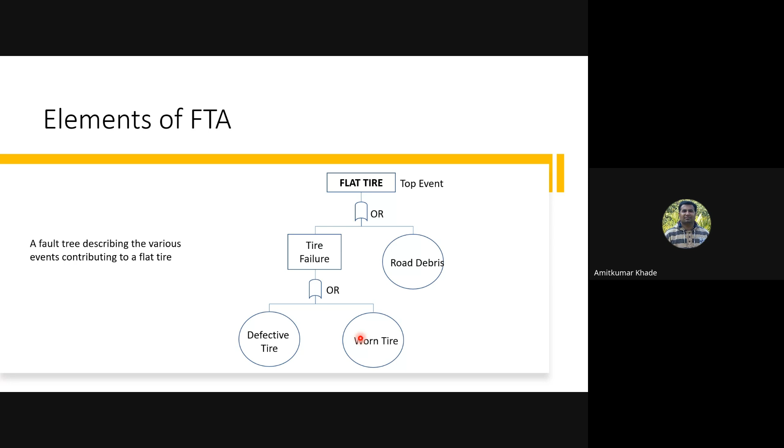So see here how we are propagating from top to bottom. Now, the FTA may have a qualitative and quantitative approach. As already told, the qualitative approach helps to find out the failure, or helps to identify the system weakness or system failure. But it will not predict the frequency of failure. So for that, we need to have the quantitative analysis also.

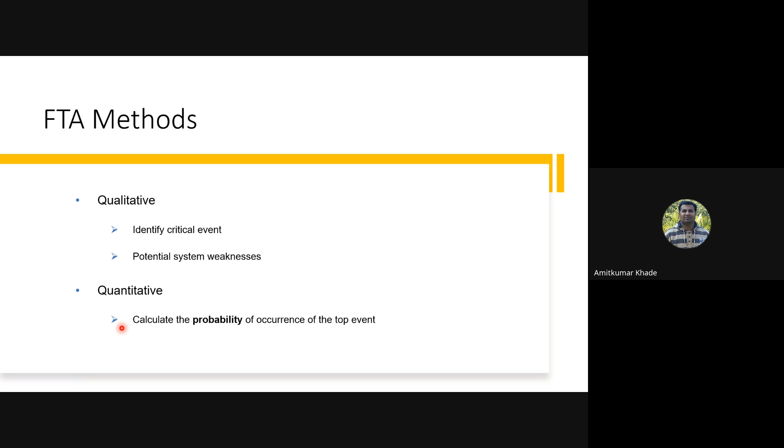So the FTA may be qualitative or quantitative. The qualitative FTA helps to identify the system weakness, or the root cause which can lead to system weakness or system failure, and quantitative analysis helps to understand the probability of, or the frequency of, system failure.

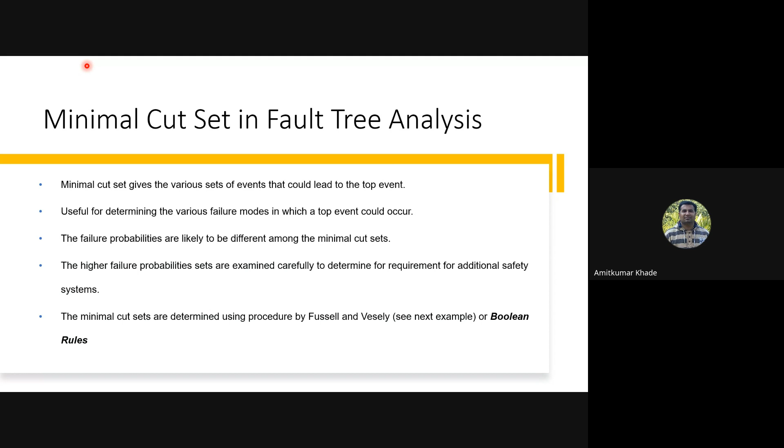And Boolean rules are very popular to calculate the minimal cut sets. Basically, they are based on set theory, having the intersection and union concepts. So what is the advantage of the minimal cut set? Basically, it gives the set of minimum faults that need to be considered to understand the system failure.

So now here I am having one FTA. Here I am having the top event. These are the intermediate events, and A, B are the different conditions. If those components fail, there is a failure in the system. So we know the Boolean rules: A plus A is A, A into A is A. We know that in Boolean we are always representing A with either 0 or 1. It is a binary system.

Similarly, there is a law of absorption, like A plus A dot B is nothing but A, and A into A plus B is nothing but A. Now, for this FTA, I want to calculate what is the probable combination of faults that can lead to the top event, or that can lead to the failure of the system. Then this is how the system is solved.

And then I come to know that the minimal cut sets are A dot C, A dot D dot E, B dot C, and B dot D dot E. Now, what is the meaning of this? If the fault in A component and the fault in C component occur at the same time, and it is not an OR condition, only in that case it causes a failure of the system.

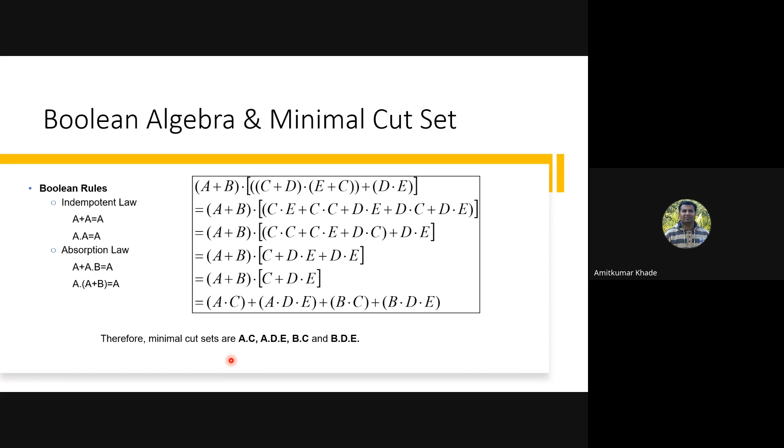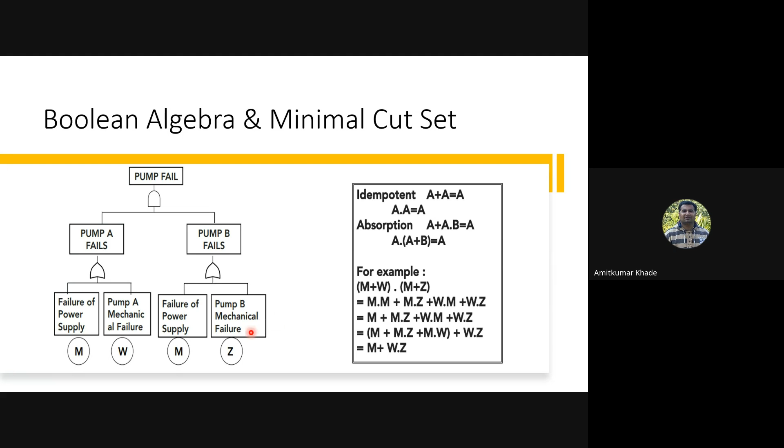If there is a fault in the W and Z components simultaneously, only in that case it leads to the failure of the system. In this way we can interpret the FTA.

Now, though it is one of the popular methods, the FTA has certain disadvantages. First, it is enormous because we have n number of components in a system. So we have to use thousands of logic gates and intermediate events.

Now, not necessarily all failure modes are considered. As already told, we always go for the minimal cut set. In the minimal cut set, we get the minimal components which tell us if that component fails, there is a failure in the system. But sometimes there may be a failure in an individual component that leads to the failure in the system, which is not covered in the FTA.

Now, when we are doing the FTA, this is one of the most important conditions: you should have knowledge of the system. Without that knowledge, you cannot build the FTA, so you need rigorous experience as a system engineer. Then it assumes hardware does not fail partially. What is the meaning of that? If hardware fails, it should fail completely. Partial failures in the hardware are not considered in the FTA analysis.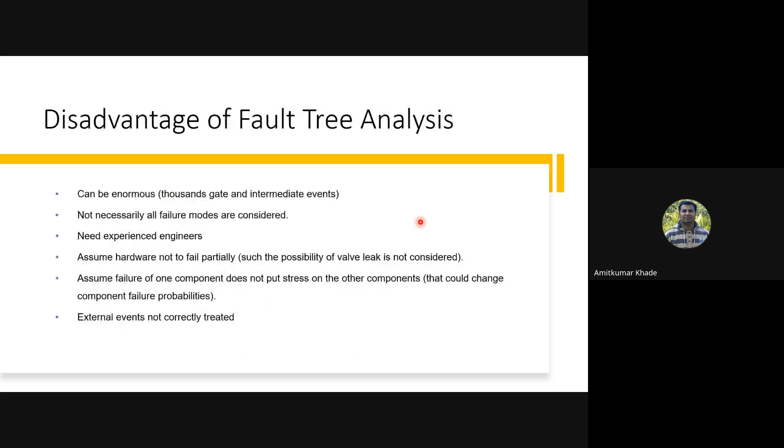Then the fuse. If the fuse is not working properly. What does not working properly mean? If the fuse gets open, if the fuse gets lower current, higher current. So here I'm having the different components and their failures, and how their failure leads to the system failure. That is the part of failure mode and effect analysis. How a failure in a component can lead to a particular undesirable event is covered in the FMEA.

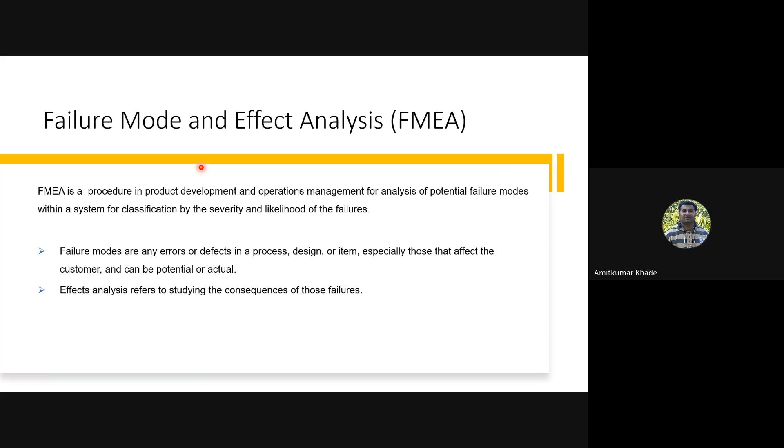So here we have different terminology. Failure is basically a loss of intended function of a particular device under the stated condition. So I know that the motor should rotate when the power supply is available, but it is not rotating or moving, so it is a failure in the motor. Failure mode. A failure mode is the manner by which the failure is observed.

Now suppose I have a resistor. In which way does the resistor fail? The resistor gets open. This is one failure mode. Or there is a drift in the resistor. Drift means the resistor value gets changed. This is another failure mode. Okay, so in this way I need to understand.

If I'm talking about the power supply, it may fail. It may be an over voltage condition. This is one failure mode. Under voltage condition, this is another failure mode. Instability in supply voltage, unstable supply, this is another failure mode. So I need to consider all the possible failure modes.

Failure effect. Immediate consequences of failure on the operation, function or functionality, or status of some item. If the power supply has over voltage, what is its impact on the motor? That is called the failure effect. If the power supply has under voltage, how does it affect the motor? If there is instability in the supply voltage, how does it affect the motor? That is called the failure effect.

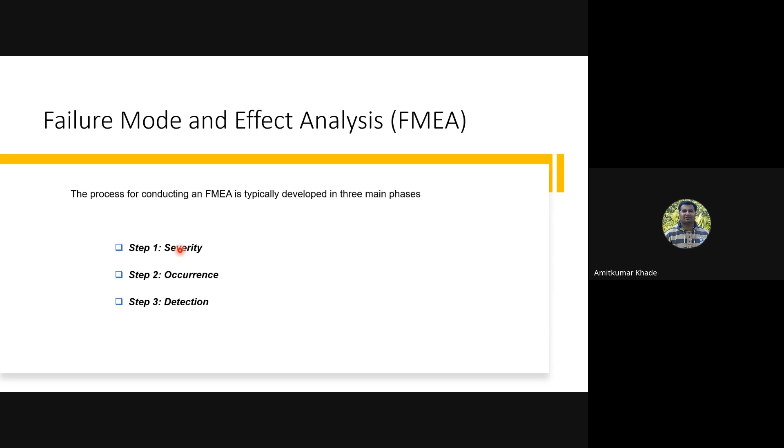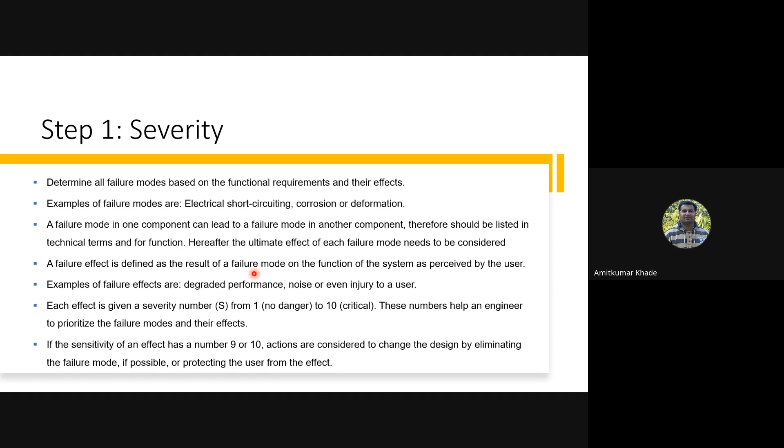And then what will be the severity? Means if the failure occurs, what will be the severity? So based on that, we are having the different aspects. Okay, so this is just the theoretical explanation of what I just told you about the different scenarios. Now for each parameter we are having the different rating from 1 to 10.

When I'm talking about the severity, 1 means no effect: it has no impact on the functionality, no impact on human life, no impact on the economy, brand value, or reputation. 2, very minor. 3, minor. 4, 5, 6, moderate. 7 or 8, it has a high severity. Okay, high severity means what?

There is a threat to human life, or a human can lose his life, or if the particular failure occurs, it can cause huge economic damage to the company, huge damage to the company reputation, huge damage to the company brand value. So that comes under 7 or 8.

9 or 10, what do you mean by very high and hazardous? Means what? If your product fails, the company has to file for bankruptcy, or the company has to close their operation. That is the severity.

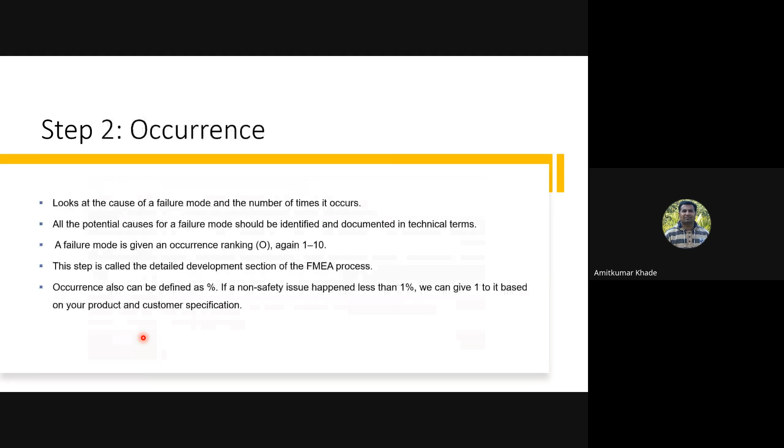Okay, occurrence, again same, we are having the parameter from 1 to 10. 1, no known occurrence on similar product or process. 2, 3, relatively very few occurrences. 4, 5, 6, moderate occurrence. 7, 8, high occurrence. 9 and 10, very high occurrence. So when I'm having a 9 or 10 rating for the over voltage condition, means what? The over voltage condition may occur repetitively in the life cycle of that device.

Then the detection. What is the probability that I can detect the failure mode? 1, that is certain. Means what? The fault will be caught in the test. 2, almost certain. 3, there is a high probability that I can detect the fault. 4, 5, 6, moderate. 7, 8 means what? I don't have any mechanism to detect that fault.

And 9, 10 means what? I don't have anything with which I can detect that fault. So the fault will be easily passed, even to the customer, undetected. Okay, so that kind of thing. Now based on that, we are having the RPN number. So what is the RPN number? Basically it is a risk priority number, and it is the product of severity, occurrence, and detection.

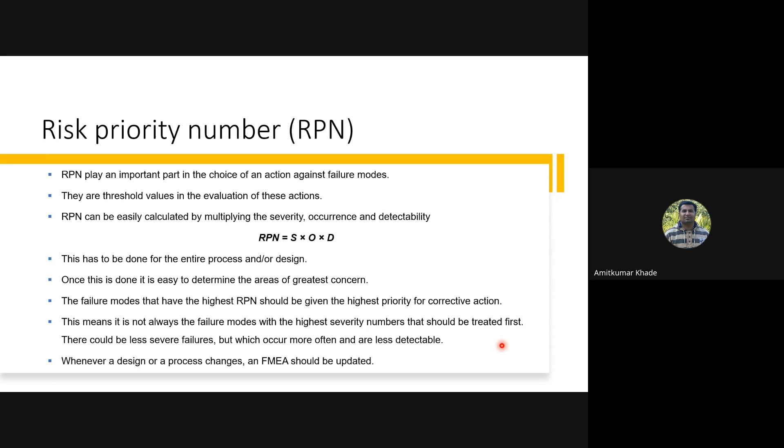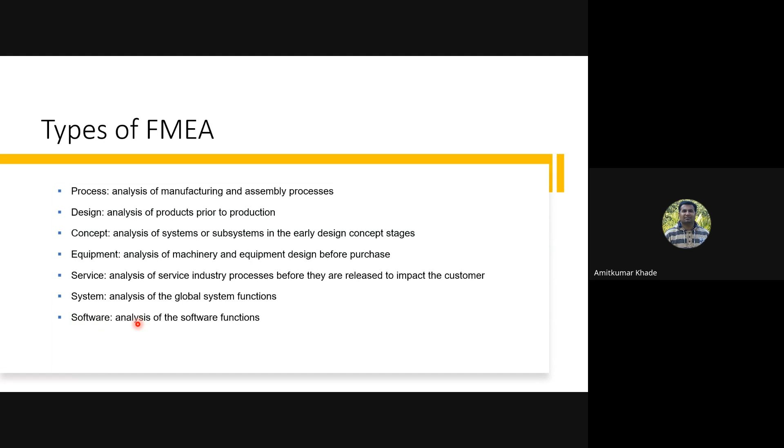There are different types of FMEA. The FMEA which talks about the manufacturing process or assembly process is called the process FMEA. The FMEA which generally deals with the design analysis is called the design FMEA. Basically, we are interested in the design FMEA, system FMEA, software FMEA. Being electronics engineers, we are dealing with different types of FMEA.

As already told, when I'm talking about what is the use of FMEA, basically it helps to identify the faults in the component which can lead to the failure in the system. And if we are able to identify this in advance, it will save a huge cost for the company, the reputation of the company, the brand value of the company. And these are the few theoretical aspects which talk about the different usage of the FMEA.

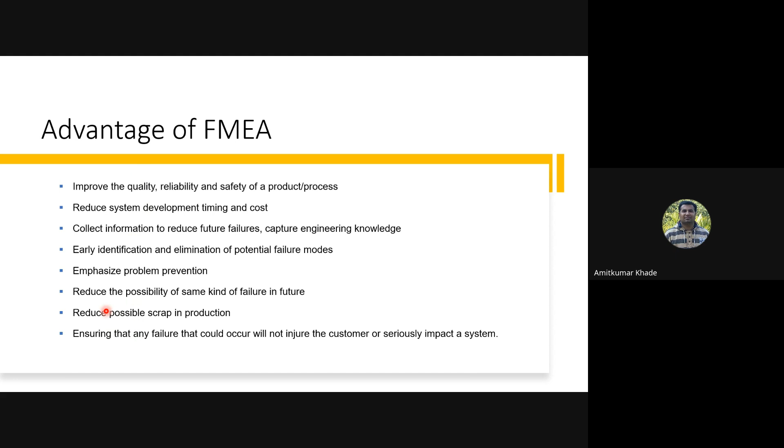These are the few advantages: it helps to improve the quality, reliability, and safety of the products which are going to be released to the customer. It helps to reduce the system development time and cost, because if in advance I am able to understand the errors or bugs in the system, I can minimize them and reduce the redevelopment cost. Okay, so these are the few advantages provided by the FMEA technology.

So here I'm having a simple example for the FMEA, which is a smoke detector. A smoke detector is a device which is commonly used in all organizations. Okay, it is one of the safety features. So what is the input to this? Presence of the smoke, if the smoke is present. And what is the process? How you are going to process the smoke.

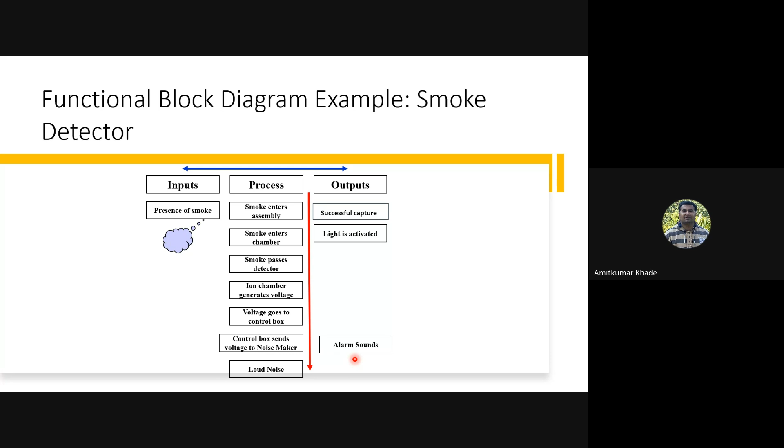So the smoke enters into the assembly, smoke into the chamber, then smoke passes to the detector. There is an ionization chamber. Then we are converting the smoke into the equivalent voltage, like that. And here we are having the outputs: successfully capture the smoke, then the light is activated, and then the alarm sounds. So these are the outputs.

So this is the typical structure of the FMEA. We start at the system level, or we can start with the lowest component, then the intermediate component, then the subsystem component, and then the final system component. Means how the failure in one component can lead to the failure in the system.

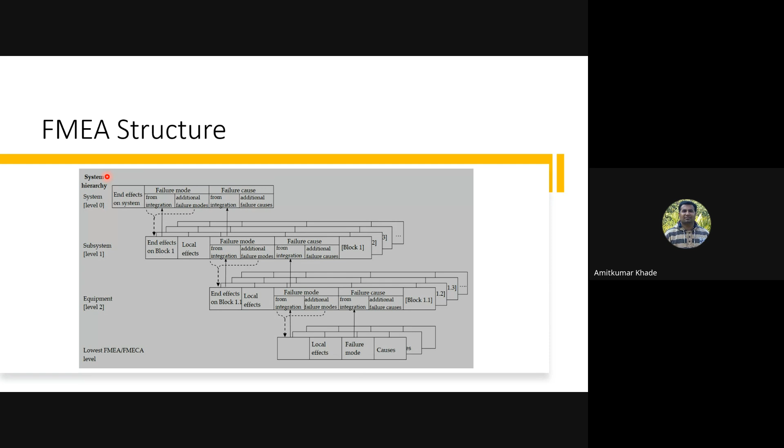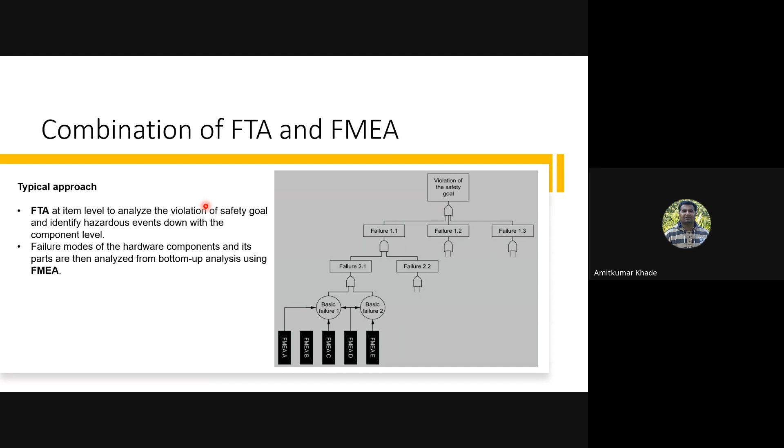Now, as already told, generally the FTA and FMEA are used in combination because we need to increase the fault coverage. One is top to bottom and the second one is bottom to top. And generally these are used in combination in every phase of the product development. So this is all about the safety analysis methods which are used for the different problem analysis. If you have any question or any query, please let me know.